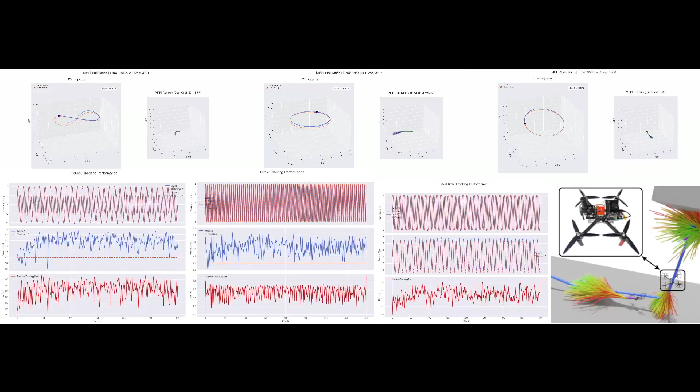So going to the first trajectory, figure eight, we have a drone that's trying to loop an eight-shaped trajectory, and initially, when I was building out the simulator and the control algorithm, my MPPI was unable to track more than three loops effectively. So I implemented a low-level controller that would augment the thrust and placed more reward for staying close to the loop, or made my cost functions more motivated to stay around the loop. Now this loop tracking is very robust and it can keep on looping indefinitely.

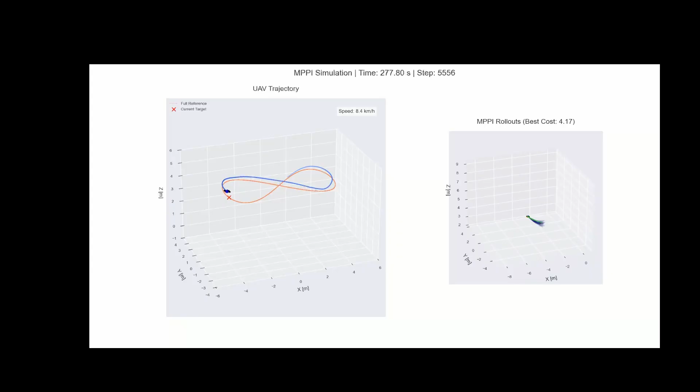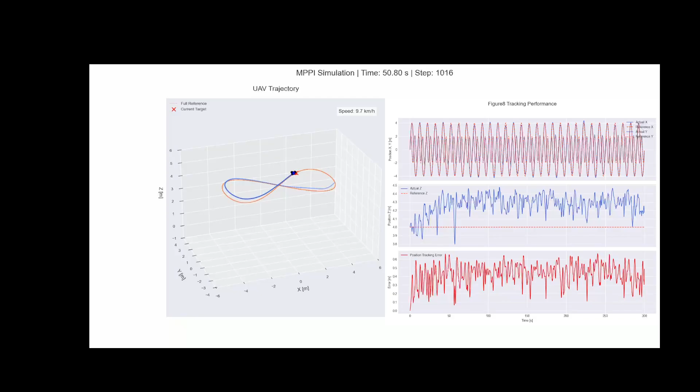I have stopped simulation at roughly 8,000 steps for all three trajectories, and here you can see the graphs on the screen. In the last graph on the right side of the screen, you can see that the position tracking error is actually really good. It mostly stays below 0.6 meters. And in the second graph, you can see that the drone thrust stays above the commanded reference, which shows the thrust augmentation being done with the PID in addition to whatever is being output by the MPPI.

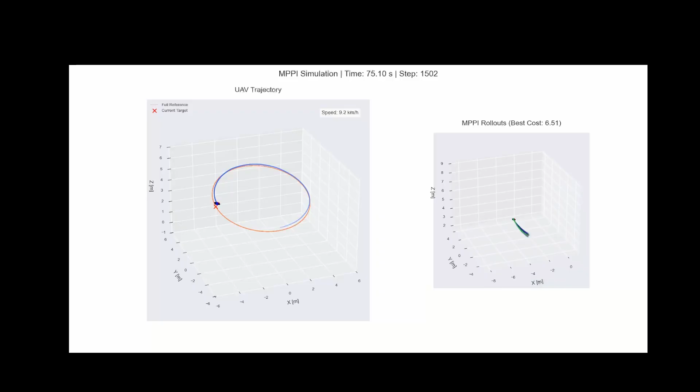Moving on, this is a slanted circle. It's a special trajectory because the thrust has to be constantly changing to loop around the candidate trajectory. You can see on the screen that the speed I'm able to achieve is around 9.5 kilometers per hour, which is not that much compared to the 44 kilometers per hour they got in the paper across all three trajectories. But something I understood was that when you have to keep changing your thrust constantly, it's very hard for the drone to keep a high speed and also achieve efficient tracking.

Going to the graphs, you can see that the position tracking error on the bottom right of your screen is actually really good compared to figure eight, because I stay below 0.4 meters of tracking error. And in the second graph, I am able to track the reference almost perfectly, apart from the peaks, and it tracks it very well.

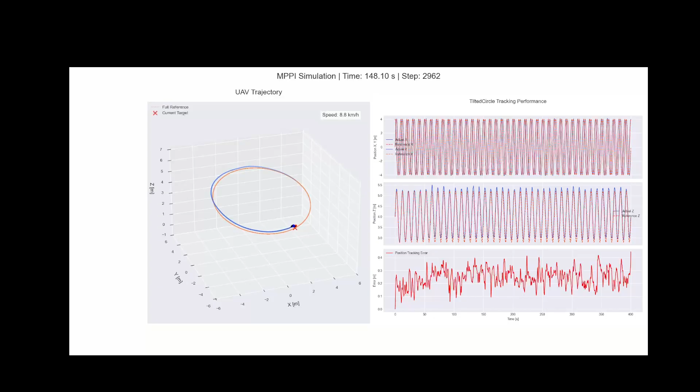Moving to circle, this is a little different experiment that I did after working with figure eight and slanted circle. I received a similar result as the previous trajectories, but I wanted to see how fast the drone can loop around the circle and not lose tracking. I had a lot of issues with initial experiments where the drone would just spiral off into space after three loops, and I tried to combat that by adding more weight towards staying on the loop in the cost functions.

I also added a new term, progressive reward, for all three trajectories, which gives more importance to a rollout that is closer to the candidate reference state. I use analytical functions to generate a reference state and slice the computed reference trajectories for the controller to compare itself against as a baseline and choose the best rollout.

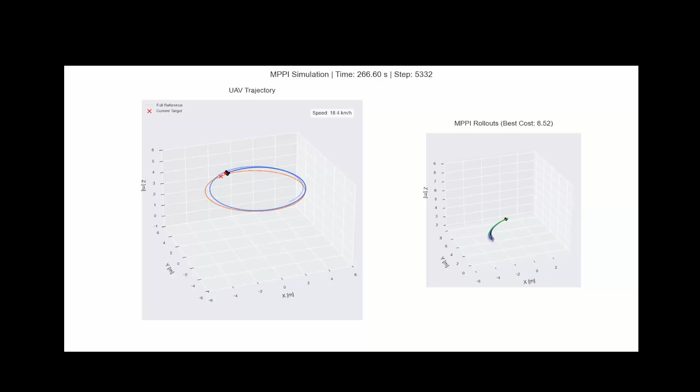In the graphs on your screen, I also achieve really good tracking where I stay within the required region, and the commanded thrust is really good because I stay above the reference given in this circle, which shows how robust the thrust augmentation is in addition to MPPI and PID.

If you want to see how you can use this, I have uploaded the code as an IPYNB file that anybody can run. It's very system agnostic. You don't need CUDA or anything. I have developed all this on an Apple M2 MacBook. So anybody can run this on their system, play around with the cost functions, and see if you can add more obstacles, which is my next plan.

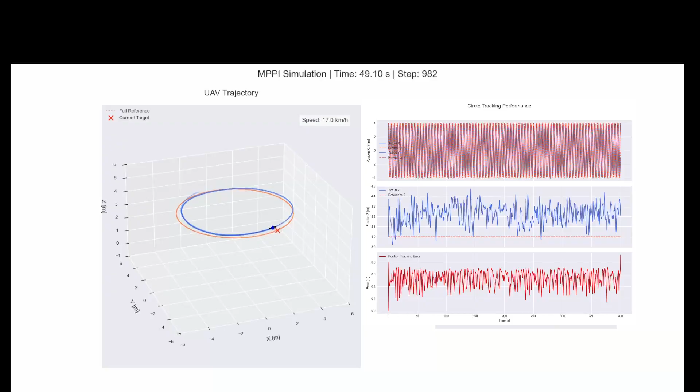I plan to add more obstacles in the scene, in the candidate trajectories, keep the same speeds, not change the cost function parameters, and see how robust a tracking I can achieve. The next step after that would be to use this knowledge and implement it on a real-time system, as sim to real would be the hardest challenge, and that's something that excites me. Thank you very much for listening to this talk, and have a good day.